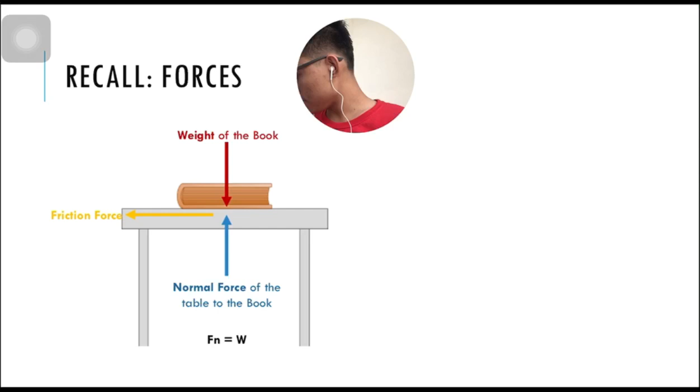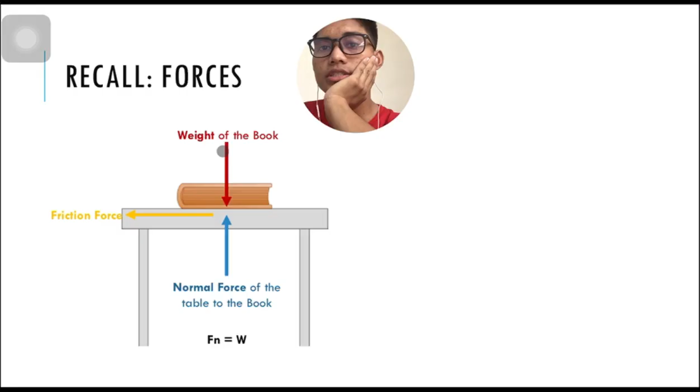For the concept of this lesson, we just have to recap this figure. We have the book na nakalagay sa ibabaw ng lamesa. The book exerted the force to the table so as the table exerts the force to the book. Normal force, weight force. And of course, we have the friction force, which is equated to coefficient of friction times the normal force.

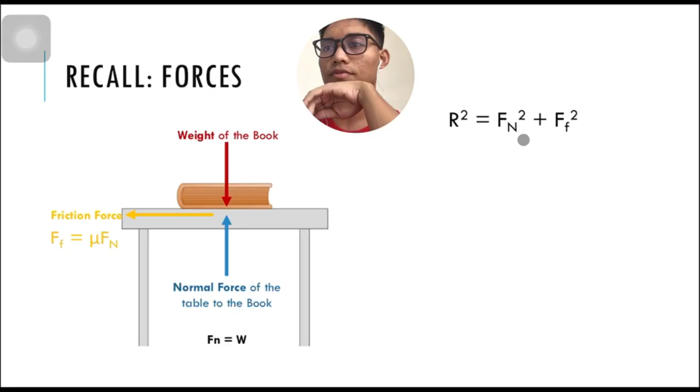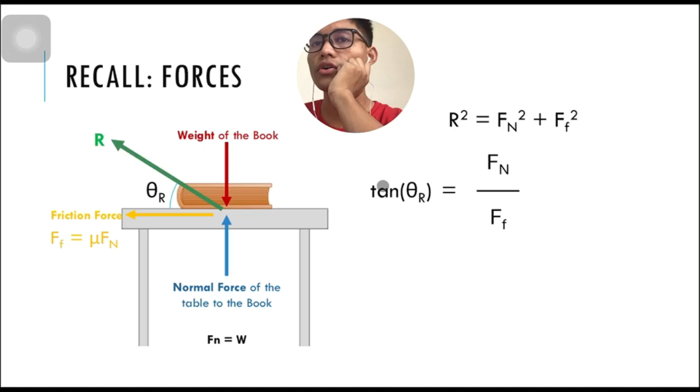To get the reactions, you just have to use the Pythagorean theorem of this one. So for the angle, this one, which is the position of the mentioned reaction force, which has its angle due horizontal. Okay. So this one and this one, so we have this.

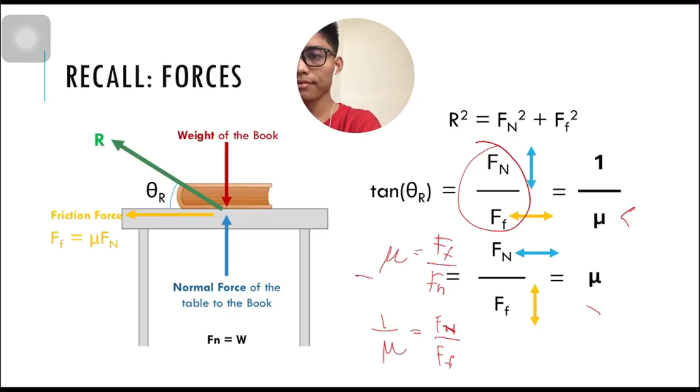Okay, so for the concept, let's solve problem number 7. So this is the particular figure. The center of gravity of the 60 kilogram block is at G. The static coefficient of friction between the block and the inclined surface is 0.3. Compute the frictional force between the block and the inclined plane.

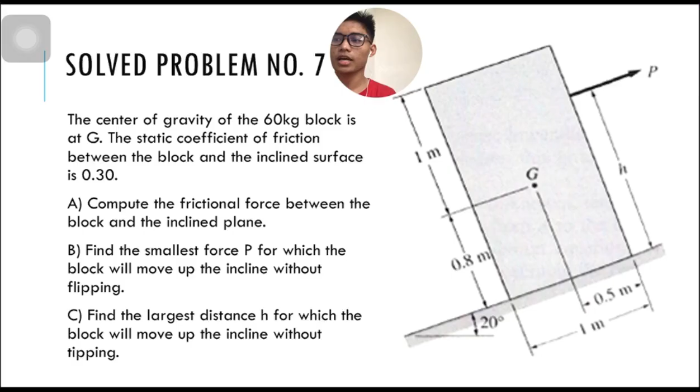Find the smallest force P, which the block will move up the incline without flipping. Find the largest distance H for which the block will move up the incline without tipping. So, math learners, always prepare your calculator beside you. So, we will try a calc tech. By the way, mine is the ClassWiz.

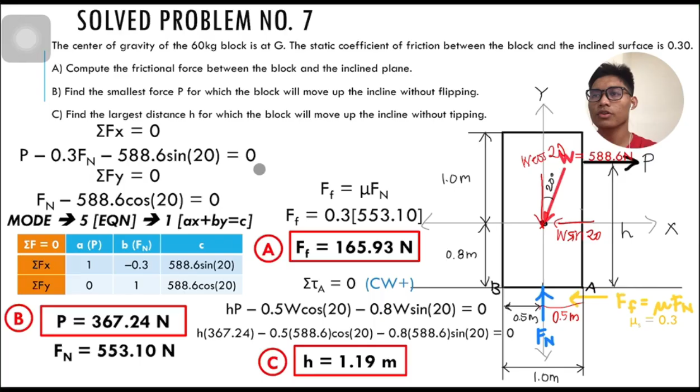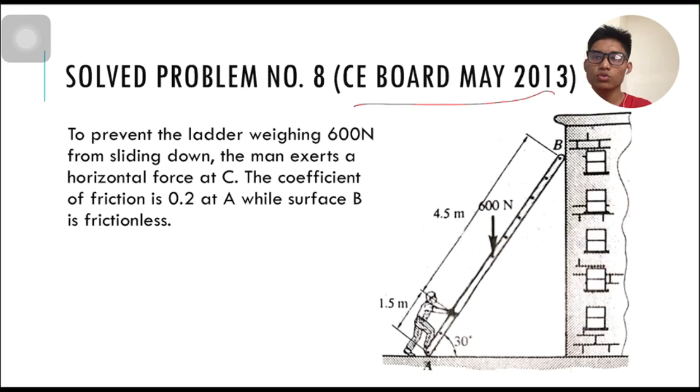To prevent the ladder weighing 600 Newton from sliding down, the man exerts a horizontal force at C. The coefficient of friction is 0.2 at A while surface B is frictionless. Find the vertical reaction at A. Find the horizontal reaction at A. And next is we are going to find the horizontal force exerted by the man at C.

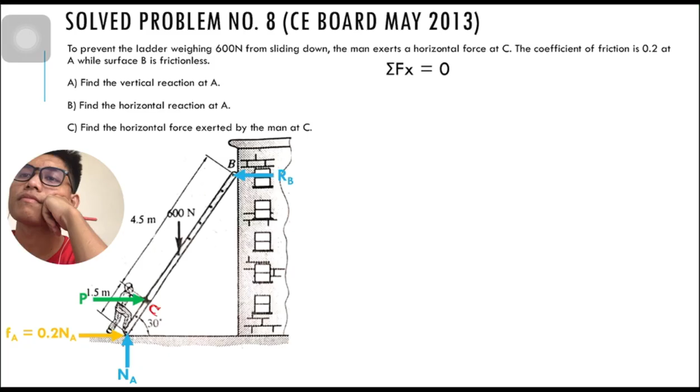Okay. Labas natin yung mga kailangan. So, we have normal force A, friction A. We have here the coefficient is 0.2 times NA. And we have reaction at B. So, B is frictionless, kaya wala tayong nilagay na static friction. Ito naman ay may tayong force P, kasi nag-exert siya at point C. So, this is point C. Okay. Ano tayo at force at X? Force at Y? At torque.

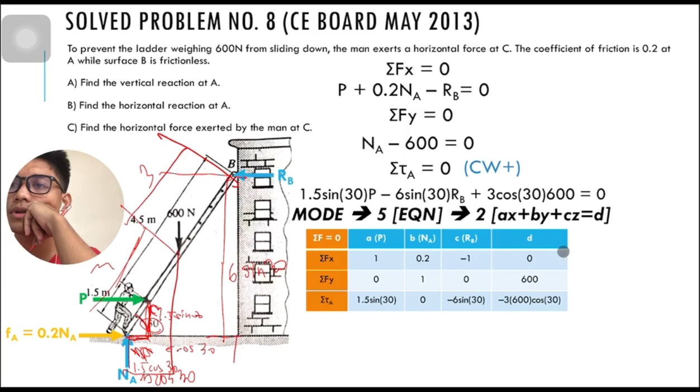What else? Yung 3. Ito, di ba weight to? So, lagi naman siya nasa half. Kung this is 3, this is 3. Mula dito hanggang dito, meron ka ditong 3 cosine 30. Ito counterclockwise, yung RB nyo. Yung P clockwise. Yung weight niya. Ngayon, yung 1.5, ito lang yun. Then 0, wala naman tayong NA. Pero meron tayong RB, we have negative 6 sin 30. Then ito, nilipat nyo sa kabila, magiging negative. Pag pinindot yung equal, meron tayong 532.82. Meron tayong 600. And we have 652.82.

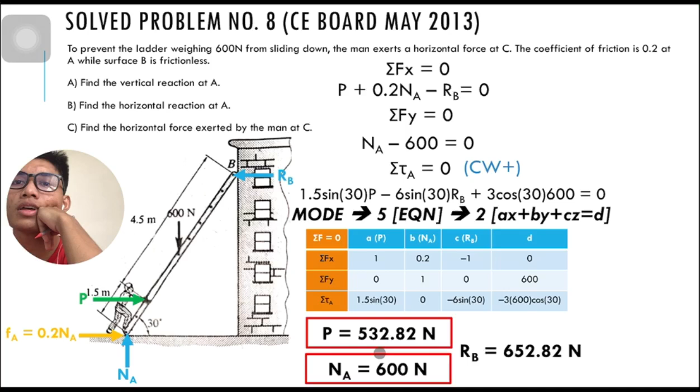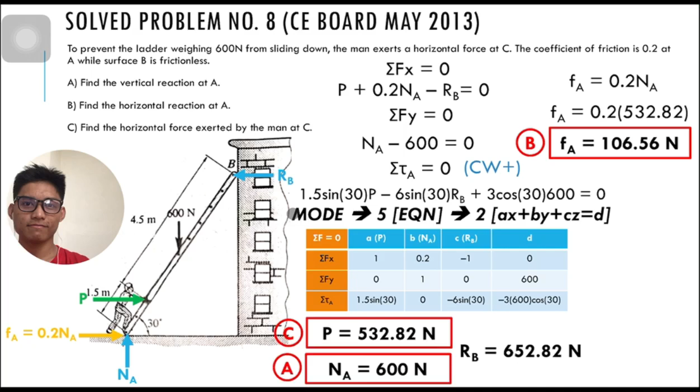Nahanap na natin yung horizontal force exerted by the man. At meron na rin tayong normal, which is your vertical. To get the horizontal, ito lang kanina yung formula. Substitute nyo lang dyan at makukuha nyo na si 106.56. Basic na. So, numberan na natin. Answers for A, B, and C. Okay.

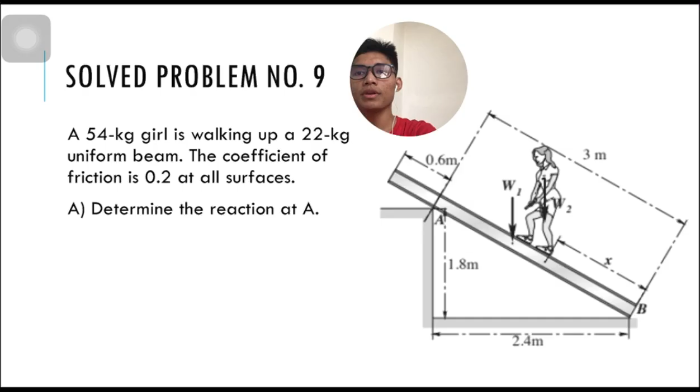For this problem, a 54 kg girl is walking up a 22 kg uniform beam. The coefficient of friction is 0.2 at all surfaces. Determine the reaction at A, determine the reaction at B, and determine the distance x up the beam that the girl can walk before the beam starts to slip. Isipin nyo, kakalkulahin nyo ba ito hanggang kailan kayang i-hold ng beam yung girl hanggang sa mahulog siya dyan.